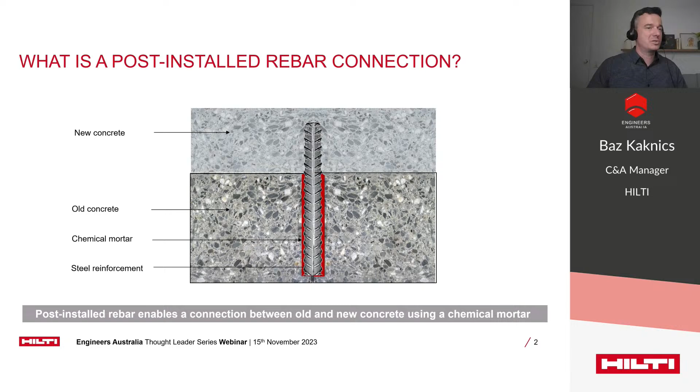The intention of installing bonded bars is to develop a monolithic connection between new and existing concrete elements, which we often refer to as concrete-to-concrete connections. This is achieved by drilling a hole into the existing concrete, which is then injected with a pre-qualified high-strength, usually special type of epoxy or vinyl ester product. After this, a cut-to-length reinforcing bar is inserted and left alone until the chemical is fully cured. The surface of the existing concrete is often roughened to improve the transfer of shear stresses between the new and old concrete. And finally, the new concrete is poured, turning the two structures into one monolithic unit.

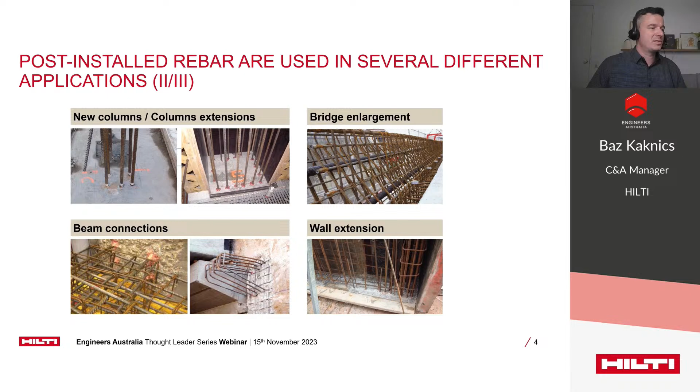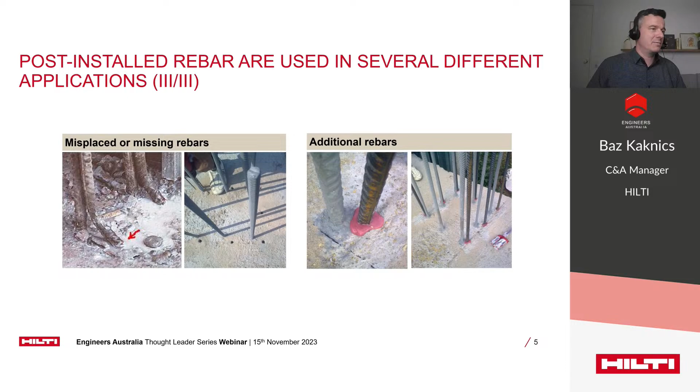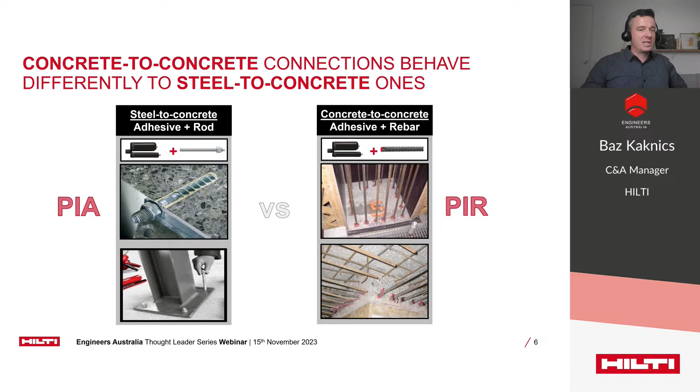One of the biggest challenges we see designers face is designing post-installed rebar connections correctly. Actually, there is little awareness out there about the existence of various design methods, and today's webinar is meant to cater for exactly that issue. Therefore, in the first part of the webinar, we will investigate how post-installed rebar design differs from post-fix anchors and exactly what design methods should be chosen for your given application.

So in order to understand the differences between the behavior of post-installed rebar and anchors, I'd like to take you back to the very basic principles and re-examine what exactly happens when we install an anchoring element into the concrete and put it under load. By doing this exercise, by the end, you'll understand some of the seemingly subtle, however very important differences between the two applications, which finally warranted the development of different design and qualification methods. Based on these learnings, you will be able to select the correct design method which is best suited for your application. So first, let's investigate the basic working mechanisms of any anchor or rebar bonded into concrete-based material.

So this is our concrete, and this is our post-installed rebar in this case.

Let's assume that the embedment depth is relatively shallow here, and we are using a very high-strength epoxy mortar, which will provide us with a strong bond into the concrete. Then, as we exert some tension force onto the bar, which the bar then transfers over the concrete via adhesive bond and friction, this will create stresses in the base material around the fastening.

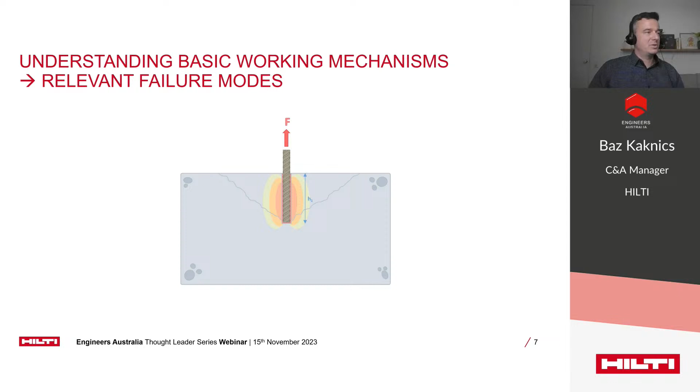Amongst those stresses, there will be tensile stresses, and we know that the concrete's tensile capacity is quite limited compared to its high compressive strength. So sooner or later, we will reach the ultimate limit state where the concrete cracks under tension. These cracks quickly progress into an abrupt failure called concrete cone breakout, and ultimately our connection fails. And here you can see the typical shape and form of the concrete cone.

After decades of research and tens of thousands of destructive anchor tests, the experts found that the concrete cone actually has a typical shape for the common concrete strength classes, which is characterized by an approximately 34-degree side angle, or in other words, this corresponds to a 1 to 1.5 depth to radius ratio.

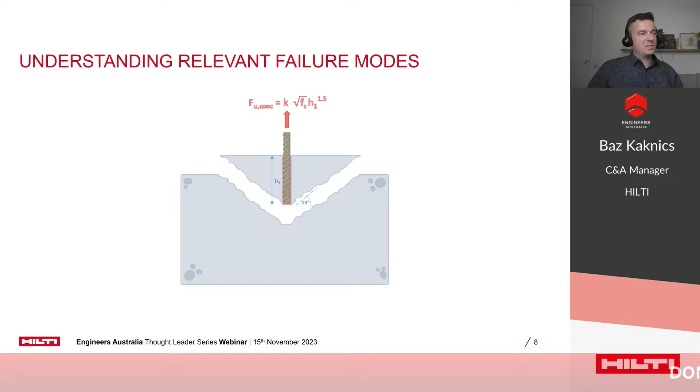Based on the existing data, the scientists were able to find a mathematical formula to quantify the concrete cone resistance, which, as you can see, is relatively a simple function of the concrete strength and the embedment depth. Note that the cone capacity is directly proportionate to the concrete's tensile strength, which here is expressed as the square root of the compression strength.

And more importantly, there is an exponential function relative to the embedment depth, which means that selecting a deeper anchorage length will result in a significantly improved cone capacity.

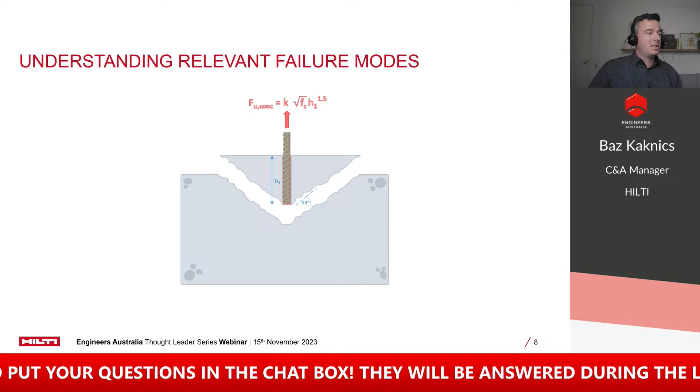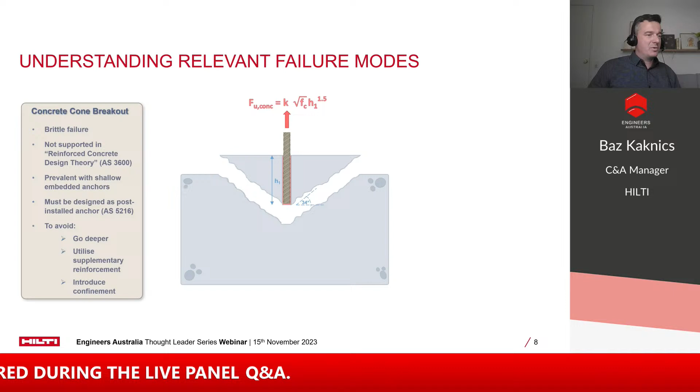So to sum it up, the most basic failure mechanism is concrete cone breakout, which is an abrupt, brittle failure mode. Brittle failure modes and the utilization of the concrete's tensile strengths are generally not supported in reinforced concrete design theory. For example, in our AS3600 standard, which covers the design of concrete structures.

But it is also true that most concrete-to-concrete connections typically involve long enough anchorage lengths so that the cone breakout is unlikely to be the governing design case.

So that being said, we will still have to live with the possibility of this failure mode in most anchoring applications, where, for example, we don't always have the luxury to select a deeper anchorage length or to directly transfer the tensile stresses onto an existing rebar, or perhaps to have any other measures in place which could hinder the formation of the concrete cone.

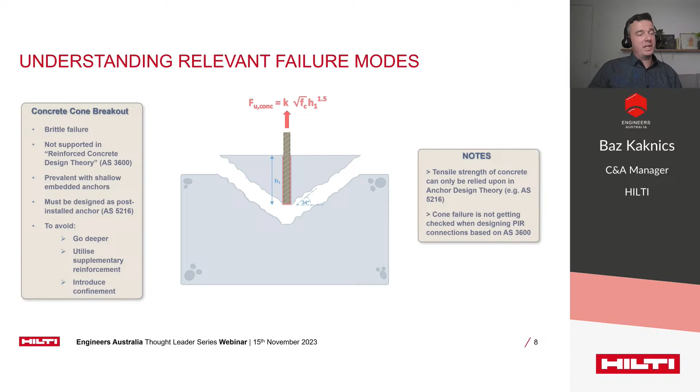Therefore, Section 6 of the AS5216, which is our design standard for post-installed anchors, mandates necessary strength checks against this failure mode. In summary, the utilization of the base material's tensile strengths and the handling of the concrete cone failure is the first major difference between anchor and rebar design theories.

And if we were to plot the development of the concrete cone capacity based on the increasing embedment depth, we would end up having a nice parabolic function. As I said earlier, by selecting a deeper anchorage length, the resistance against cone breakout will improve exponentially.

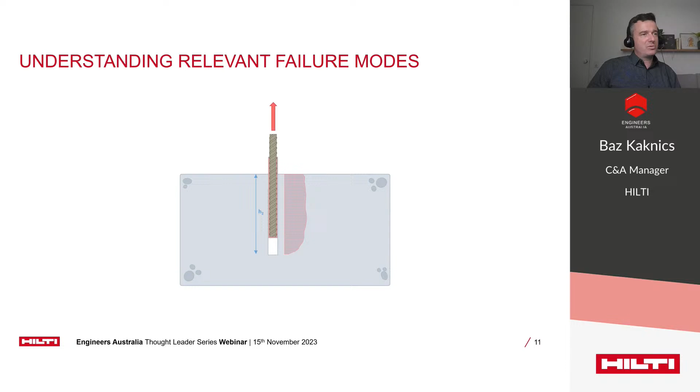This happens right until we reach the ultimate limit state. And at this point, we will experience a drop in the maximum load along with increasing anchor displacements. In other words, a pullout or bond failure happens.

Multiple studies have verified that up to an embedment depth of approximately 20 times the bar diameter, which is 20D, the bond stress may be assumed uniform along the entire anchorage length in the ultimate limit state.

In case of a pure pullout failure, the mathematical formula is again very simple. Tau here represents the chemical bond strength, which we simply need to multiply with the cylindrical bond surface area in order to calculate the anchor's pull-out resistance.

In the relevant Australian design standards, the formulas might look different to the simplified equation shown here. This is because, for example, AS5216 accounts for the potential combination of two failure modes instead of one, namely a combined cone and pull-out failure.

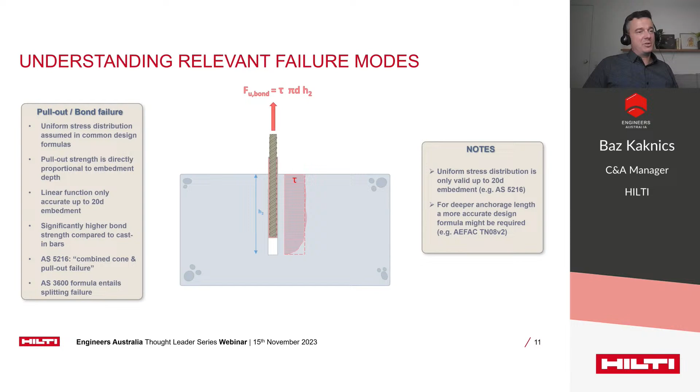AS3600, on the other hand, for the design of cast-in bars, is combining the pull-out with a potential splitting failure, which could limit the development of the full bond strength in case there is not adequate concrete cover surrounding the bars. Regardless of the different approaches in the various design standards, the basic principles of bond failure are still valid here, and an important takeaway is that the uniform stress distribution only holds true up to an embedment depth of 20D.

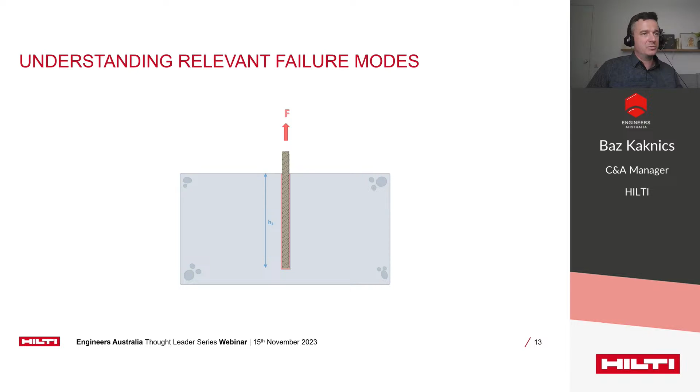Finally, the last failure mode I will look into today is basically the ideal outcome for most designs, which is the full development of the reinforcing bar—in other words, being able to reach full yield or steel failure. It's probably not necessary to explain the mechanisms of this failure mode; it's well predictable by a relatively simple and reliable formula. One of the main benefits of fully developing the bars is to utilize the bar's ductile reserves to achieve more ductility in the design. Also, by designing to the full yield of the reinforcement, the use of materials in a structure can be optimized, minimizing overall costs as well as the carbon footprint of the build.

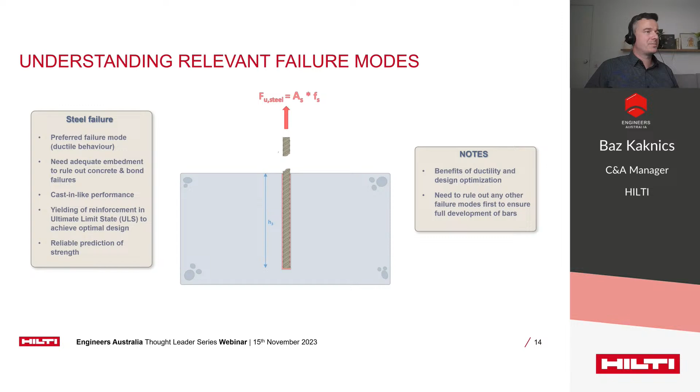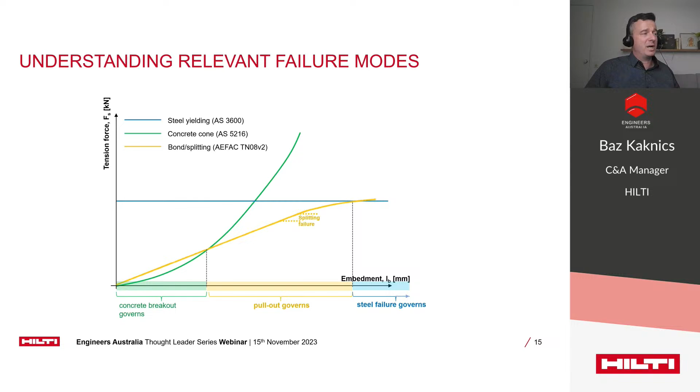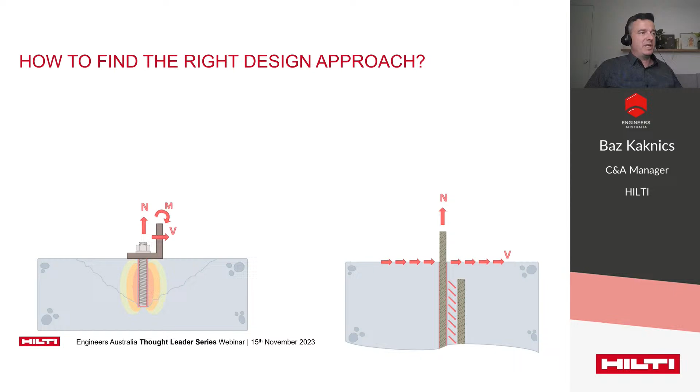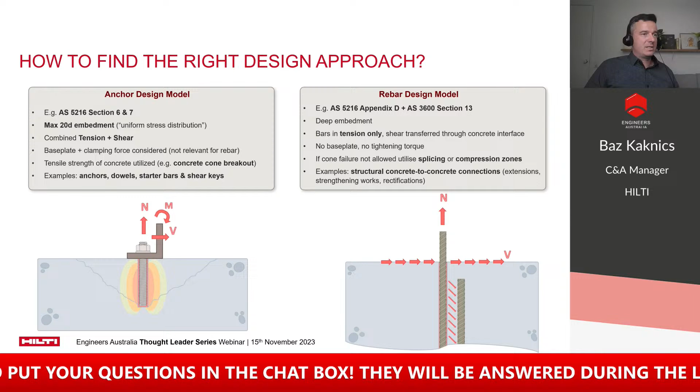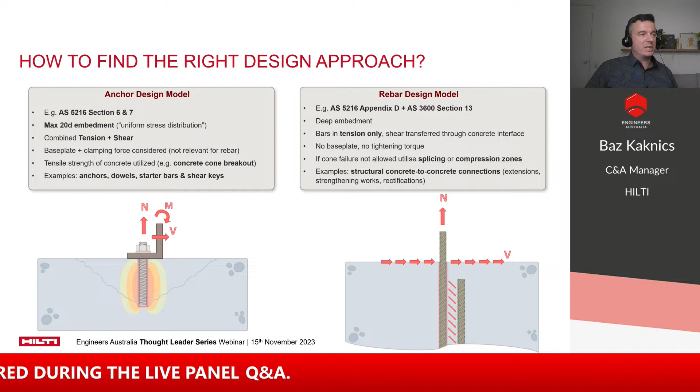In summary, the main goal of my presentation today was to help understand the differences between anchor and rebar design theories. In certain cases, rebars may be designed based on the principles of anchor theory, for example, when used as shear keys or dowels, and the embedment depth is not greater than 20D, as we discussed earlier. Designers might also use this design method for shallow embedded starter bars, where concrete cone failure is expected and must be accounted for. For the more traditional applications of post-installed rebar, however, the specifically developed rebar design methods should be utilized. These are suitable and safe for deeper embedment depths, but the bars must only take tension forces, and shear force must be transferred by different ways, for example, by roughening the concrete interface.

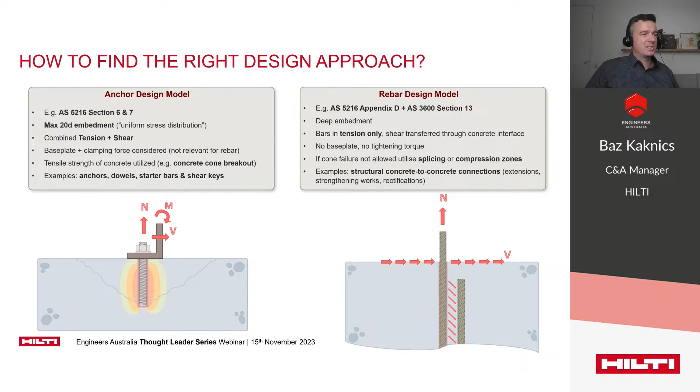In case the design method does not allow for the direct transfer of tensile stresses into the base material, for example when using AS3600, then lap splicing must be utilized, or the bars must be anchored within the compression zone of the structure. A couple of application examples for using the rebar design method include typical concrete-to-concrete connections, slab extensions, wall-to-slab, wall-to-beam connections, and various rectification works, as we showed at the beginning of the presentation.

Now that we've differentiated rebar from traditional anchor applications, I believe it's important to go through and summarize the different design methods which currently coexist in our code landscape. As shown in this slide, there are three different approaches for designing post-installed rebar, and each situation should be assessed correctly by the designer so that the most suitable design method can be chosen.

The first one, on the left-hand side, which means designing the rebar as an anchor, often relates to dowel or shear key applications. The qualification is according to the EAD document ending with 499, and upon successful assessment, the chemical gets awarded with an ETA technical approval, such as the one referenced here. The design method is according to AS 5216, sections 6 and 7, just like in the case of normal anchors under combined tension and shear loading.

The second option in the middle follows the common principles of reinforced concrete design theory, and the bars will be designed identical to cast-in bars based on the principles of AS 3600. This method will cover common structural rebar connections where the development length is typically longer than 20D and the shear force is not directly transferred by the bars.

The chemical here will require a special qualification report, based on the assessment document ending with 087. This method doesn't utilize the tensile capacity of the base, and the tensile stresses will have to be transferred either via lap splicing with an existing bar, or the area of the fixings must be under constant compression so as to rule out the possibility of a concrete cone failure.

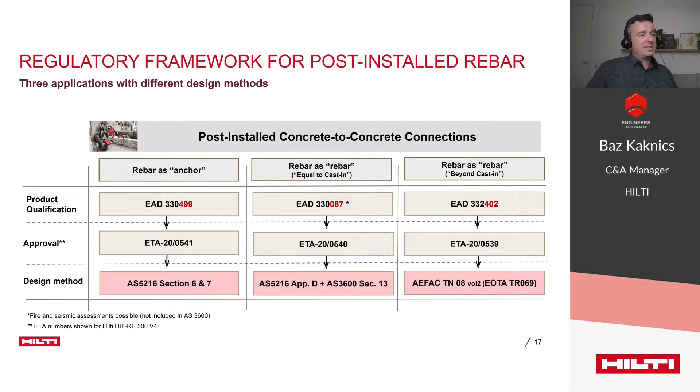The third option on the right is a relatively new design method, which combines the benefits of the previous two. This will again require a third-party technical approval and qualification, and the performance of the bars may be higher than that of cast-in bars. This new method utilizes an improved bond splitting model, which is very important to emphasize. It differs by product to product, so it's product dependent, and it will be explained in greater detail during the second part of this webinar.

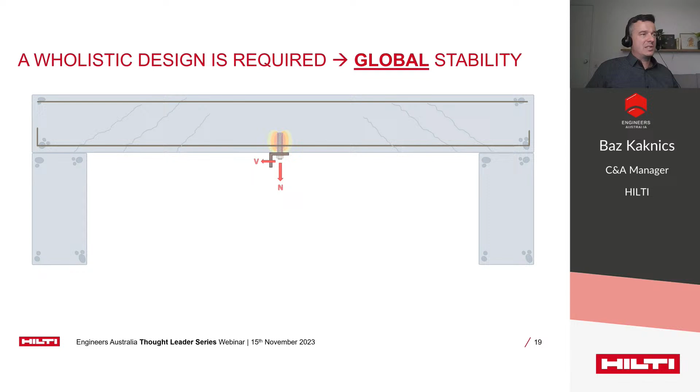Just another word of caution: the failure modes discussed here today are all considered local failure modes, which may develop as a direct result of the interaction between the fastening and the base material. The designer should, of course, never forget to ensure that the design actions introduced by the anchors can be safely taken up by the concrete structure, and that there is adequate load path for the safe transmission of these additional forces down to the foundation of the structure.

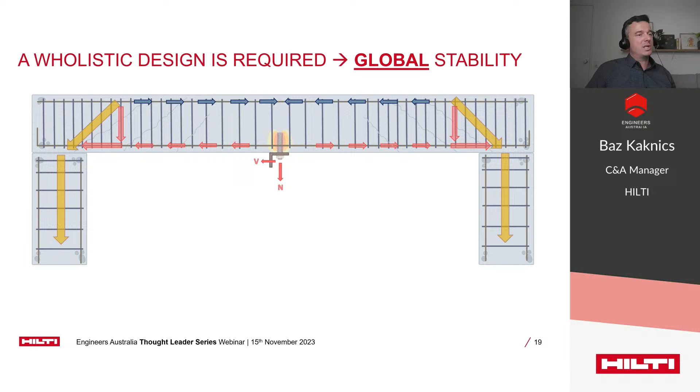For example, it must be verified that the structure has adequate shear strength and existing or supplementary reinforcement to safely transfer the stresses away from the anchorage. To better understand the requirements for a concrete structure to accommodate the anchor forces, I would recommend checking out and following the specifications of Appendix C within the AS 5216 standard.

With that, my presentation concludes, but please stick around, as in the second part of the webinar, Dr. Tilak Pokharel from AEFAC will provide you with an in-depth explanation of the design procedure utilizing the latest international and local guidelines. Thank you very much for your attention.

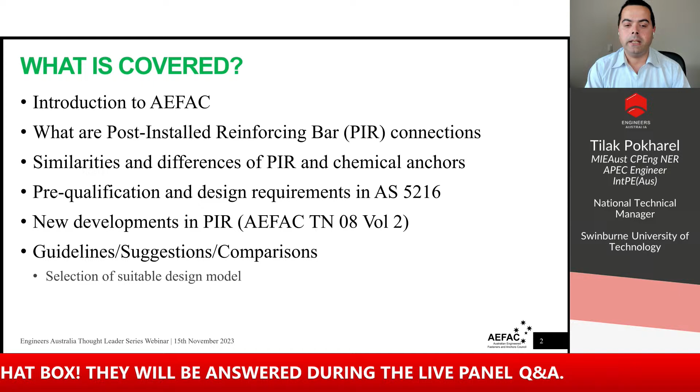Then I will talk about the new developments in post-installed rebar connection and the utilization of that newly developed design method in designing post-installed rebar connections in Australia.

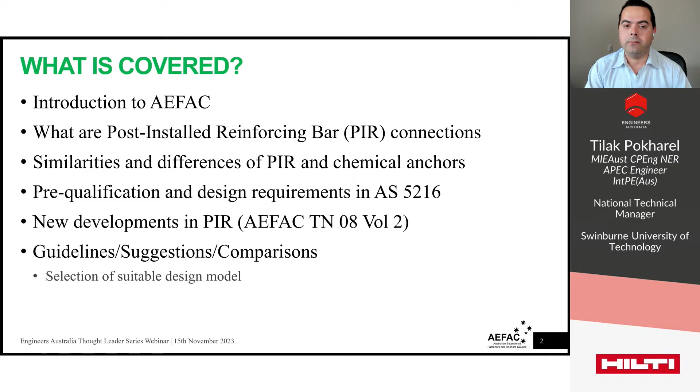Finally, I will conclude my presentation by providing some guidelines or suggestions on selecting proper design method and a brief comparison of different design methods we have available in Australia.

I would like to start this presentation with three critical elements that are very important to ensure the quality assurance of anchors. This presentation will be focusing on basically those three elements.

The first one is pre-qualification. The anchor product must be independently tested and assessed to be fit for purpose. For example, if you are using anchors in post-install rebar applications, they must undergo a separate and unique type of testing and assessment with reinforcing bar to meet the requirements.

The second one is design. Robust design is required to ensure all possible failure modes are considered, and design is done by considering all those failure modes and identifying the critical failure modes.

And finally, installation. Installation is usually the weak link in the anchorage industry. There have been many failures occurred in Australia and globally in the past because of poor installation practice. So all three of these elements are key for the quality of the connections.

For those who do not know about AEFAC, AEFAC stands for Australian Engineered Fasteners and Anchors Council. It is a not-for-profit industry initiative. It was founded in 2012 by Swinburne University and six other industry partners.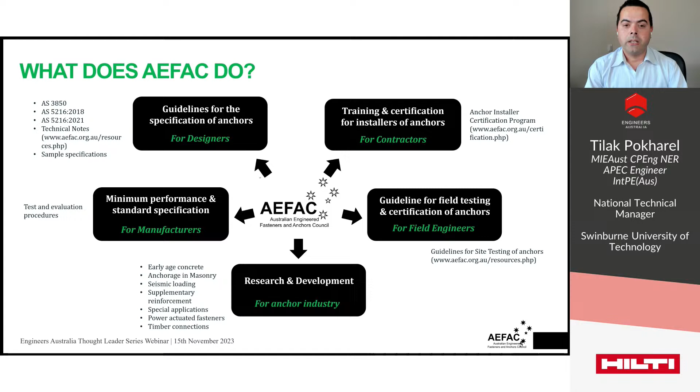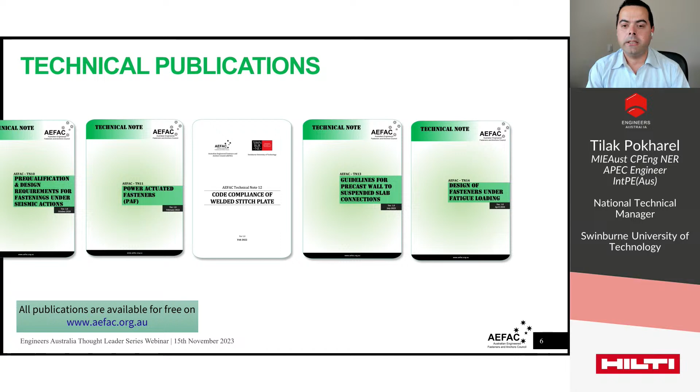Before I move into the post-install rebar part, AEFAC has several technical publications, including technical notes that you can see on the screen. If you are interested in any of those, they are freely available to download on the AEFAC website, aefac.org.au. Now let's come back to the post-install rebar.

Let's look at the definition of PIR and chemical anchors that are currently used in Australian standard AS 5216. AS 5216 2021 defines post-install rebar as the reinforcement that is anchored into mature concrete using adhesive in a drilled hole. The standard defines chemical fasteners as the post-install fasteners that include a steel element.

The steel element could be a threaded rod or reinforcing bar, and a bonding compound that transmits load from the embedded steel element into the base material, which is concrete. They are also known as bonded fasteners or adhesive fasteners, depending on where you are.

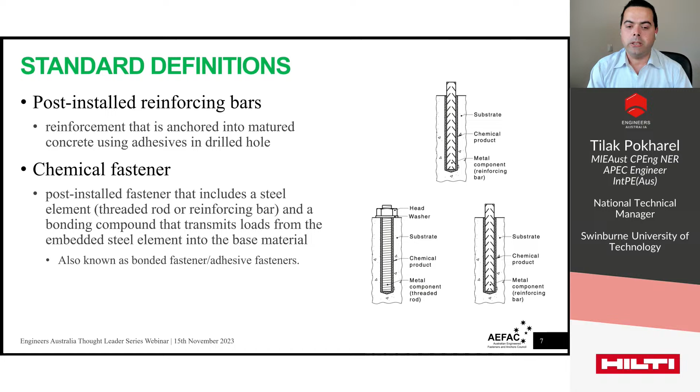There are some overlaps between PIR and chemical fasteners, as you have seen in the definition. Thus, some designers confuse chemical fasteners and post-install rebar fasteners. The previous speaker has already defined the differences between those anchors, and I'll go a little bit deeper into that. Hopefully by the end of this presentation, it will be clear that there is a distinction between these two types of fasteners, and that will help avoid confusion.

As already defined, but for completeness, or if you missed that part, I would reiterate: post-installed rebar is the rebar that is installed after the concrete has been poured and cured, usually after 28 days of concrete casting. Once the concrete is hardened, a right-size hole is drilled at the required location.

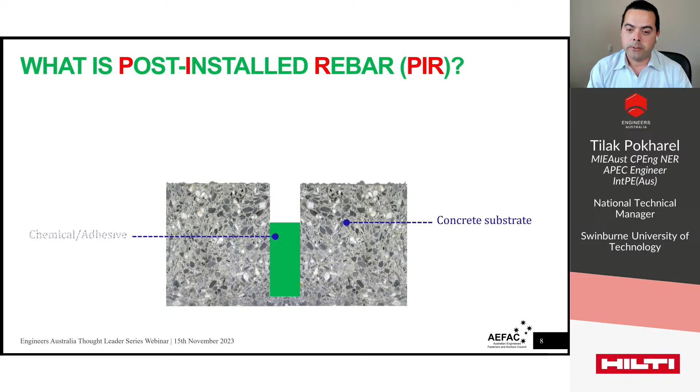After the hole is cleaned as per the manufacturer's installation instructions for the chemical being used in the application, the chemical or adhesive is filled into the hole, usually two-thirds full, and then the reinforcing bar is inserted.

It is very important to note that post-install reinforcing bar is only designed to take tension force. No shear force is taken up by the reinforcement. New concrete is poured on the exposed part, and it is very common to make the surface rough before pouring the new concrete, as the shear force will be resisted by this interface.

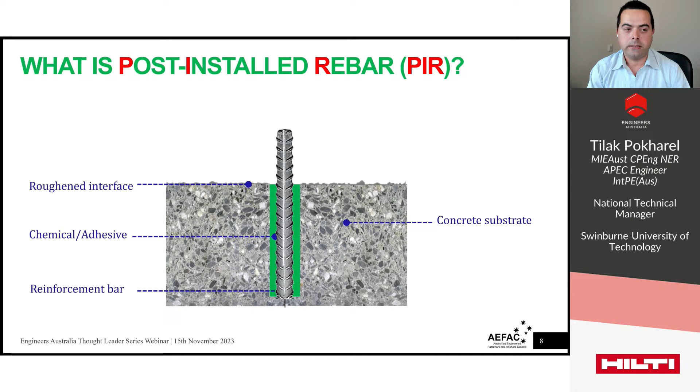In Australia, we have Australian Standard AS 5216, and the recent edition is 2021, for the pre-qualification and design requirements for post-install fasteners and cast-in fasteners. That standard covers the chemical fasteners as well as PIR, post-install reinforcing bar connections.

This recent edition, 2021, covers PIR in Appendix D. In this presentation, I'll not go into the detail of the design model and design process we have in the standard. Rather, I'll focus on the concept and more about the limitation and the scope of that method, and I will highlight why the new method is important and what is improved in the new design model.

The design model we have in the current standard is referred to as a current rebar model in this presentation. For the new model, I'll be using a new rebar model, which I'll introduce in the next couple of slides later. I want you to note that the design method we have in AS 5216 2021 Appendix D is exactly the same as the design model we have in AEFAC Technical Note 8, Volume 1.

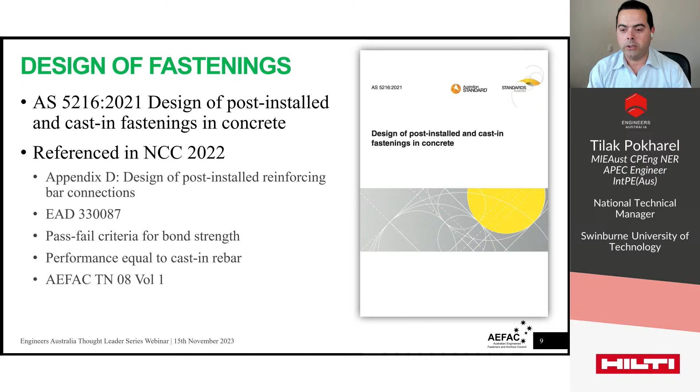So before looking into the post-install reinforcing bar in detail, let's briefly look into the design of chemical fasteners in tension in accordance with AS 5216.

As Baz has introduced, we need to consider different failure modes, and we need to find the minimum value for that as design capacity or the tensile capacity of fasteners. There could be different failure modes: steel failure, concrete cone failure, pull-out failure, or the combination of pull-out and concrete cone failure, concrete splitting, and could be more if you are using supplementary rebar or something.

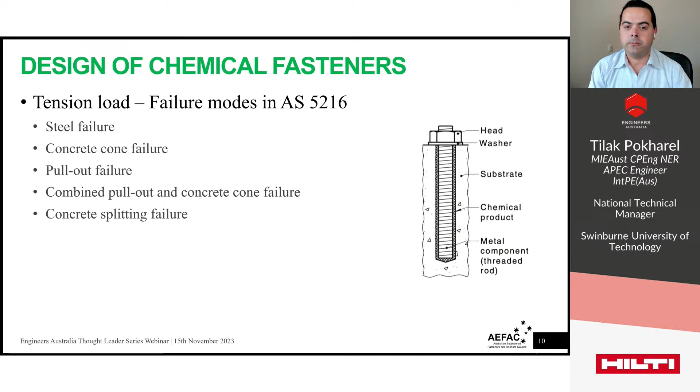You need to define or verify each failure mode and identify the critical one, and that will govern the design strength or the design capacity of the fasteners. This is the fundamental concept AS5216 is based on, and it's sometimes referred to as the CC method, concrete capacity design method.

There are some limitations in terms of diameter and embedment depth of the fasteners. In this presentation, I will highlight the limitation in terms of depth, because this is important for the post-installed reinforcing bar connections. If the chemical fasteners is less than 20 times the diameter of the anchor, then the anchor model, or AS5216, can be used: chapter 6, 7, and 8.

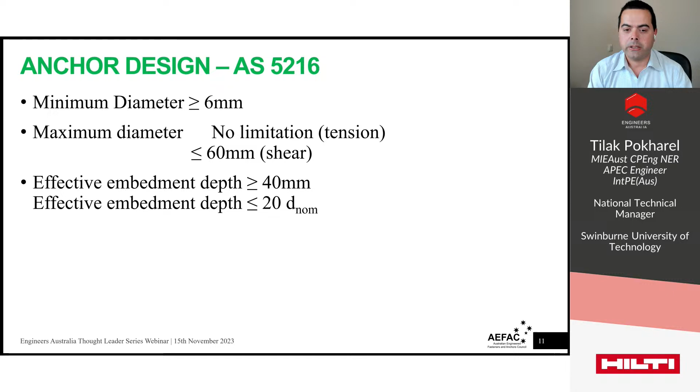So that design process will include the verification of 5 or 6 failure modes I included in the previous slide. This design model we have is referred to as anchor model in this presentation. This anchor model can be used for threaded rod as well as post-install reinforcing bars.

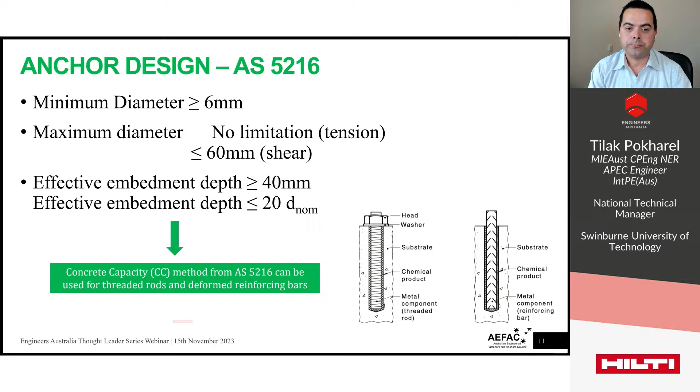But it is important to note that the scope of the pre-qualification document should clearly say that this chemical, or this application, is safe with reinforcing bars. And this is referred to as anchor model, as I mentioned earlier.

So it is assumed in 5216 that the bond strength is uniform throughout the embedded length of the anchor. The previous speaker has clearly explained that, and this assumption or concept is called the uniform bond stress model. And this is true for shallow embedments; the uniform bond model will be applicable to shallow embedments.

It has been tested extensively in Australia and Europe and other countries for 8 to 10 times the diameter of the anchor, and it has been proved to work well if the embedment depth is about 20 times the diameter of anchor. This is the reason why there is a limit on the maximum embedment depth of the anchor in the anchor model.

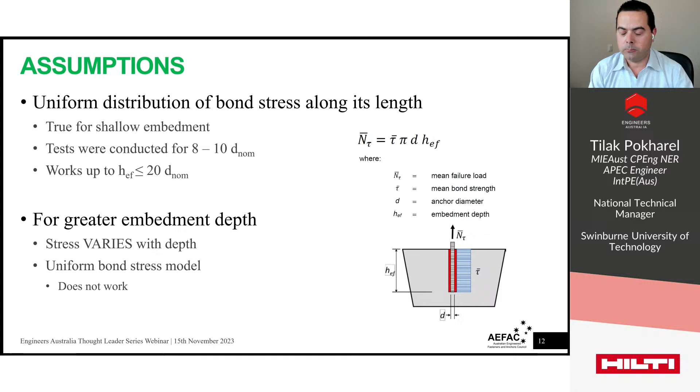So, as you'd expect, this uniform bond stress model does not apply to anchors with deep embedment in reinforcing bar applications. We cannot use this anchor model from AS5216 to calculate the pull-out capacity of the long post-installed rebar, which is more than 20 times the diameter of the anchor.

Then what are the options? There are a couple of options available, fortunately. One option could be using the well-established AS3600 standard, the concrete standard, to calculate the development length, and that development length can be used as the anchorage length in post-install rebar application.

This is only possible if we have some evidence that proves the post-install reinforcing bar works at least similarly or better than the cast-in rebar. This is very important because the presence of an extra layer of chemical between the reinforcing bar and concrete could alter the performance of the system. Also, the overall behavior of the connection depends on the chemical, its strength, stiffness, and other parameters. So this is again, obviously, outside the scope of AS3600.

If you have fasteners with a pre-qualification report such as ETA that proves the PIR works at least similar to an equivalent cast-in application, then the embedded length of the post-install reinforcing bar is equal to or longer than the development length. Rebar would yield, or there would be steel failure or rebar failure in tension, and we can use that principle in designing the post-install reinforcing bar.

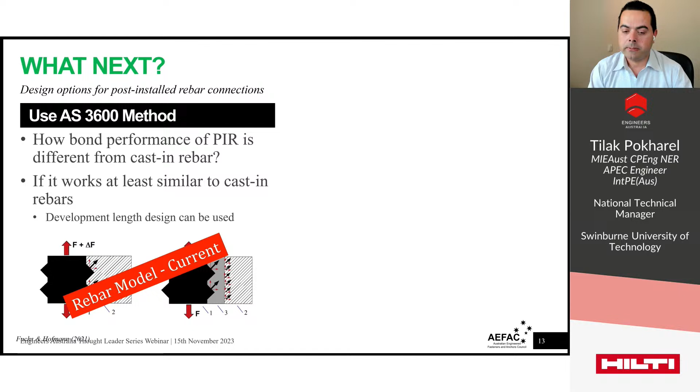So the question is: is there any alternative to the current model which would utilize the better bond behavior of chemicals and design less conservatively than the current model? The answer is yes. There is a better alternative design model available, which I will be talking about in the next few slides. This model is referred to as rebar model new in future slides.

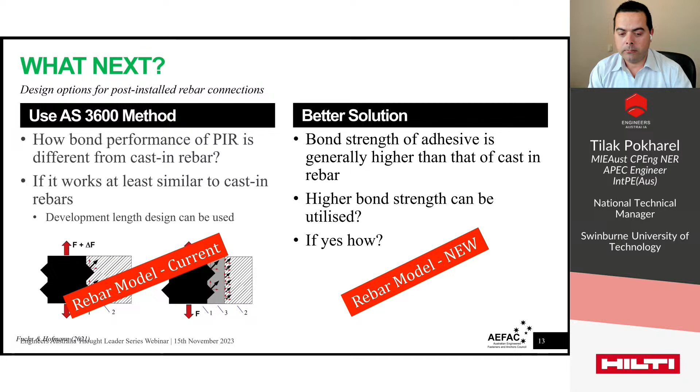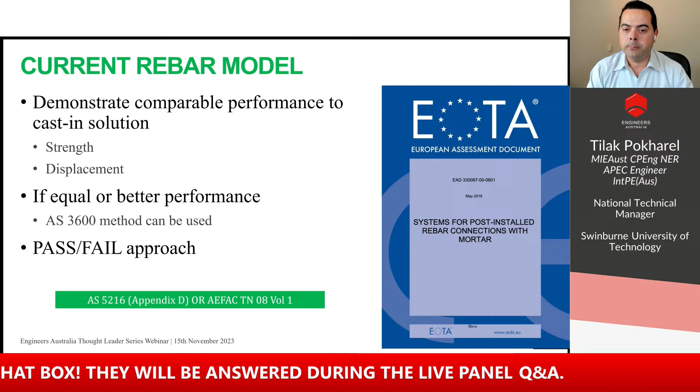The current rebar model has some limitations. Before I talk about the limitations, let's look briefly at the design concept. AS3600 is used to calculate the development length, as I mentioned earlier, and we use that development length as the anchorage length in the current rebar model.

To demonstrate the comparable performance of the PIR to cast-in solutions, we need to do a test according to Appendix D of AS5216, which refers to EAD 330087. That means if the PIR system, the post-install reinforcing bar system, has passed the test and assessment in accordance with EAD 330087, it is proved that the PIR works at least similar to or better than cast-in rebar, so you can use the AS3600 design principle, section 13 of AS3600. It is very important to note that even if it is proved the post-install reinforcing bar works better than cast-in rebar, this standard does not allow you to utilize the better performance of PIR.

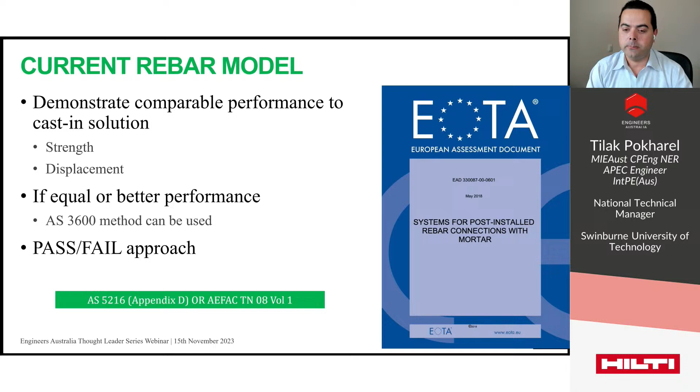In other words, this is a pass-fail approach. That is, if the bond strength of the post-install reinforcing bar is higher than that of the cast-in rebar, we still have to use the bond strength of the cast-in rebar. I'll explain this with numbers in the next slide.

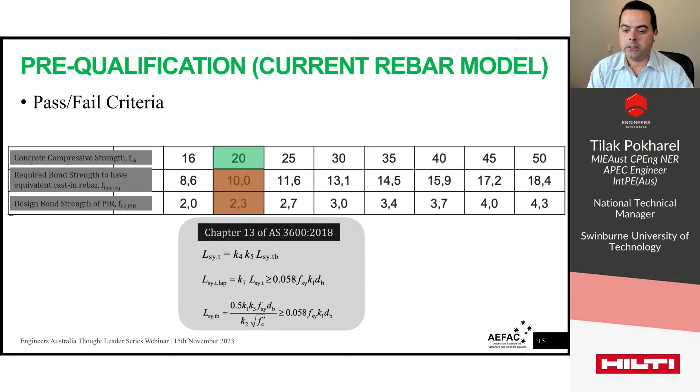So there is a large safety margin here. In the pre-qualification method we have in AS5216, or in the current rebar design model, it does not matter how large the bond strength from the experiment is - whether it's 10, 20, 30, or 40. The design bond strength is still 2.3. We use chapter 13 of AS3600 to get the development length as the anchorage length.

So what is the issue here then? The bond strength of chemicals we use in connecting post-install rebar is significantly higher than the cast-in equivalent. But as we just saw, the current rebar model does not utilize this higher bond strength.

The limitations in AS5216 were put in place to prevent slip of the rebar under serviceable conditions, to avoid splitting of the concrete, and to address the uncertainty of unequal distribution of bond strength over the embedded length. Thus, if we have a new model that addresses slip under serviceability load, splitting of the concrete, and the variation in stress distribution along the length of the rebar, we could utilize the higher bond strength of the post-installed rebar system.

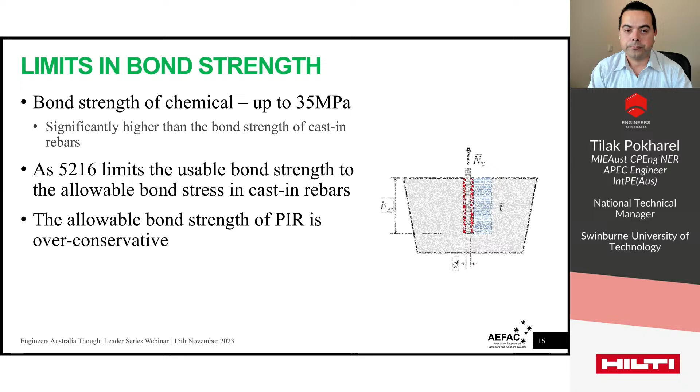So why is it important to take the better or more realistic bond behavior of PIR systems? To understand this, let's look at the effect of bond strength in the overall behavior of post-installed reinforcing bar connections. The bond behavior typically has two aspects: bond pull-out and concrete splitting.

The splitting behavior of concrete is dependent on parameters such as concrete cover, concrete strength, confining reinforcement, diameter, geometry of the rebar, spacing, pressure, and so on. There are so many parameters that affect the splitting of the concrete.

To understand it more clearly, with all other parameters being the same, the bond splitting strength will increase with increasing concrete cover, and this increase continues until it is capped by the bond pull-out strength. This behavior was shown very clearly in the graph by the previous presenter.

However, currently these aspects are not considered while recommending the design bond strength values for PIR. AS5216 or the current model requires the test to be performed using a confined tension test setup, which is used to prevent concrete cone failure. This requires a relatively large cover to prevent concrete splitting.

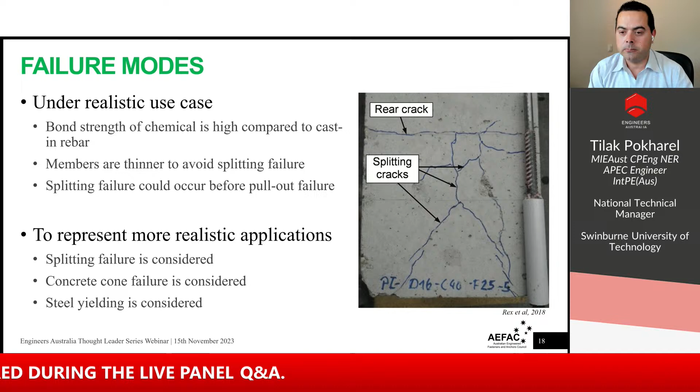Therefore, to understand the behavior of a post-installed reinforcing bar system under realistic conditions, the test needs to be performed using a test setup that could simulate these boundary conditions, which allows splitting of the concrete, concrete cone breakout, and steel yield. The test method I'm referring to here is the test method in the pre-qualification stage.

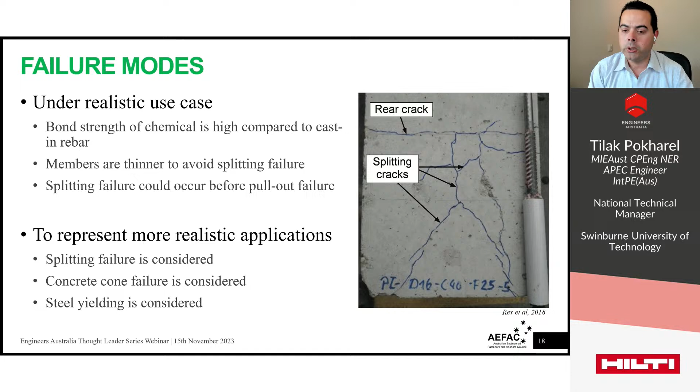The new rebar model covered in AEFAC Technical Note Volume 2, Technical Note 8 Volume 2, includes all those requirements. So in summary, these are the limitations of the current rebar model. One of the important limitations I haven't covered so far is the type of connection that can be designed using the current rebar model.

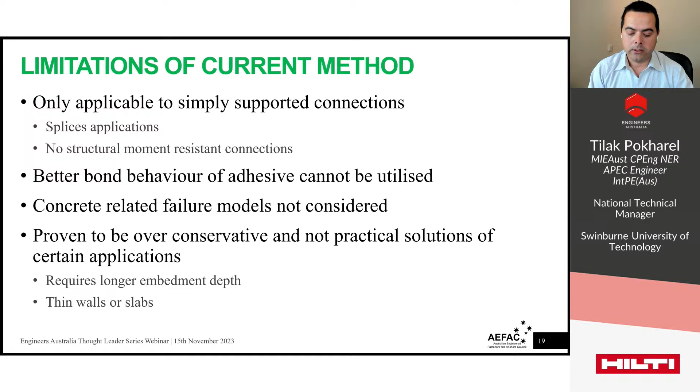The current model can only be used to design simply supported connections. It cannot be used for moment resisting connections, and all other limitations I have already explained in my previous slides. So to address all these limitations, we now have a new rebar model that can be used to design moment resisting concrete-to-concrete connections.

There are still some limitations in minimum and maximum rebar size or embedment depth in this design model, and all those model limitations are given in the ETA or the pre-qualification report, not similar to AS3600.

The new design model is presented in detail in the recently published AEFAC Technical Note 8 Volume 2. This document is freely available to download from the AEFAC website, aefac.org.au, under the resources page. Similar to Volume 1, the design method is limited to static and quasi-static loadings.

If your application requires other loading conditions such as seismic and others, there are other pre-qualification and design methods available. It is recommended to contact the fastener supplier or manufacturer if you have an application outside Volume 2 of the technical note. The design procedure presented in that technical note is applicable to the post-installed rebar system assessed as per EAD 332402 and having a valid ETA.

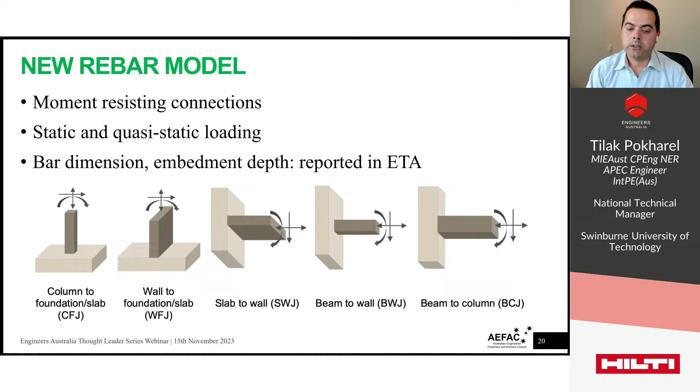As I mentioned earlier, the shear transfer through shear friction between the existing and new reinforced concrete elements should be ensured by some other means, as rebar doesn't take shear load. Some other means could be surface roughening prior to casting the new member against the existing concrete.

To design post-install reinforcing bar connections using the new rebar model, the design principle and procedures are similar to the current process we have in AS5216-2021. The design action effect needs to be smaller or equal to the design capacity.

The design capacities are calculated from the characteristic values of the resistances, similar to AS5216, and the capacity reduction factors. There are a few additional capacity reduction factors in this design model, presented in AEFAC Technical Note 8, Volume 2, and some parameters are already listed in the current version of AS5216.

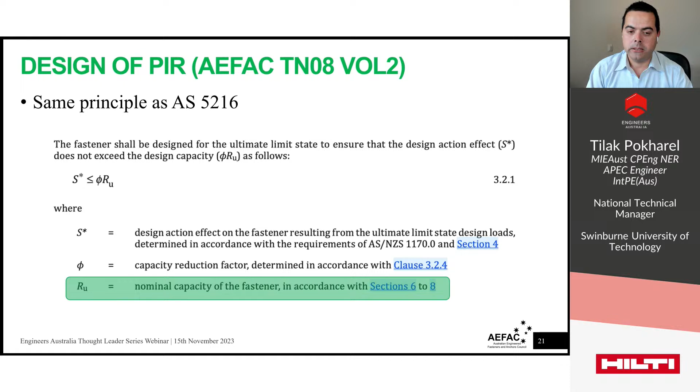Most values and parameters are also reported in pre-qualification reports such as ETA. The major difference in this new rebar model is how we calculate the characteristic capacity of a post-install reinforcing bar. In the current model, there is only one possible failure mode, steel failure, and other failure modes are avoided by having a large embedment depth or large cover.

But in this new anchor design theory, there are other possible failure modes available. As you can see on screen, the resistance is calculated from 3 different failure modes, and the minimum of these will be the resistance of the post-install reinforcing bar. Unlike the current rebar model, the new rebar model considers 3 failure modes.

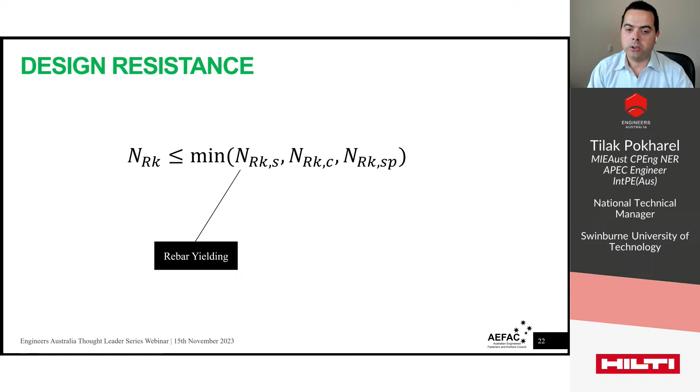The first one is rebar yielding, which is there in the current model as well. Concrete cone failure is not covered by the current rebar model, and bond splitting failure is again not covered by the current design model. The combined pull-out and concrete breakout resistance is also covered in the bond splitting model.

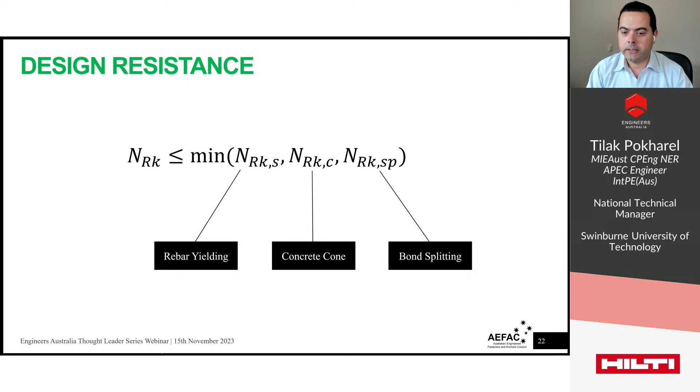That includes some geometric parameters not covered in AS5216, such as small edge distance or smaller spacing between different rebars, as well as anchorage length higher than 20 times the nominal diameter of the rebar. So, 3 failure modes.

The first one is, I think, a straightforward and very accurately predictable behavior: the steel failure, steel rupture of the post-install reinforcing bar. It is determined by geometric parameters such as cross-sectional area of the rebar and the yield strength of the rebar. If you know those two parameters, which you do, you can calculate the characteristic steel failure capacity of the connection.

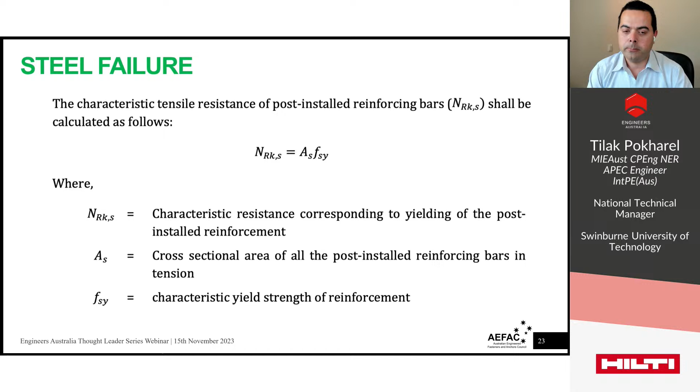So even if there are multiple failure modes shown in the previous slide, it is recommended to have this kind of failure mode in the design of post-install rebar connections, because it is a very predictable and ductile failure and has a few advantages over other possible failure modes.

Second one, concrete cone failure. If you are familiar with AS5216 and the concrete cone design model we have in Chapter 6 of AS5216, this shouldn't be new for you. This is exactly similar to the anchor model we have in AS5216-2021.

The tensile capacity, N-RKC, is determined from the reference characteristic capacity, N0-RKC, and there are 4 or 5 other parameters. The reference capacity N0-RKC, this concrete cone capacity of a single fastener without any disturbance, is calculated using the very popular concrete cone formula: K1 times square root of FCK, times LB to the power 1.5.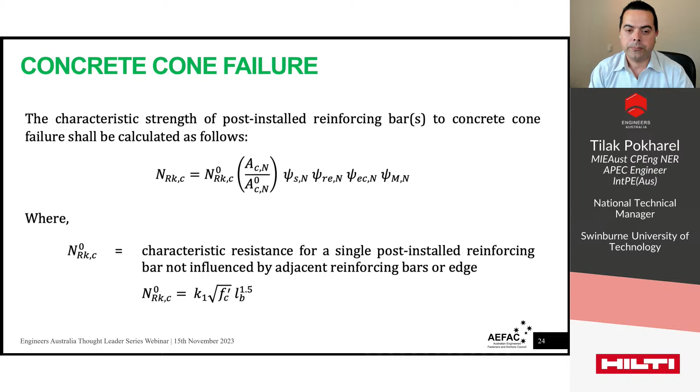The only difference here is we have HEF in AS5216; in the new rebar model, we use LB as the embedded depth of the fastener. Other parameters are similar to those presented in AS5216. The only difference is the limitations in the configuration of fasteners given in AS5216 are not applicable when designing a post-install reinforcing bar connection.

This is because they are not designed to take a shear force, and the plane-section-remains-plane principle, or the rigid base plate assumption, is automatically satisfied if you are connecting one member to another designed according to AS3600. This is the new concept we have in anchorage design.

We don't have this bond splitting failure in AS5216. In this model, the bond slip behavior is considered to address that bond slip behavior I introduced earlier. The bond slip behavior, or concept, is taken from Model Code 2010.

Some of the curve-fitting parameters for that Model Code bond slip behavior are determined from testing. As I mentioned earlier, a number of tests were conducted to obtain those parameters, and most of the tests are unconfined tests that allow concrete-related failure as well. As you can see on screen, there are a few parameters highlighted in gray, which are determined from the ETA, the pre-qualification test we conduct to assess their performance.

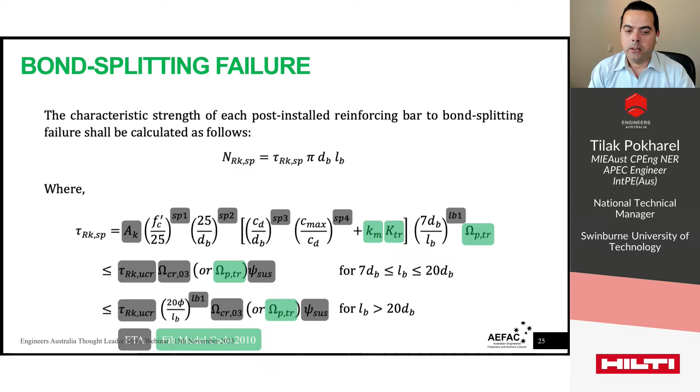A few parameters for the bond slip behavior are determined from the model code. The ones highlighted in green are determined from Model Code 2010, which addresses the effect of transverse reinforcement or confinement provided by the transverse reinforcement and stirrups, and also addresses the effect of cracking, in this case 0.3 mm cracks, in the bond slip behavior. The other parameters, which are not highlighted, are project specific requirements and can be safely used to calculate or determine the bond splitting capacity of the post-install reinforcing bar connections.

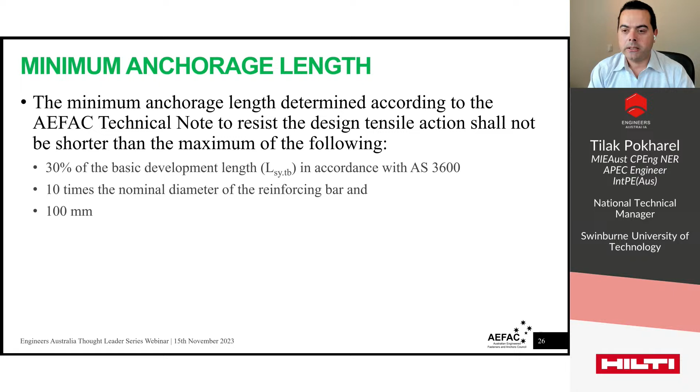There are some limitations as well, such as minimum anchorage length and maximum anchorage length, which can be found in the AEFAC Technical Note Volume 2.

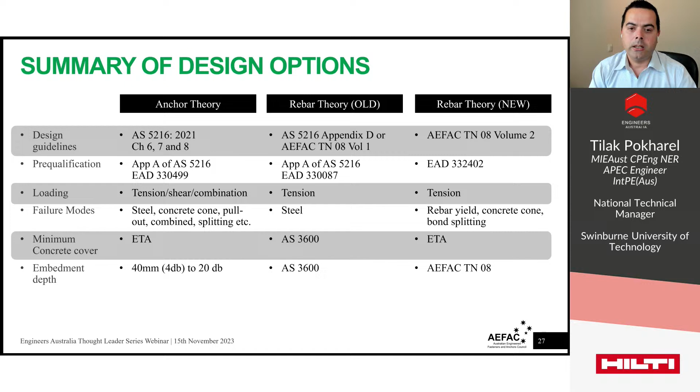This is the summary of the models we have in Australia at the moment: Anchor Theory, Rebar Theory Old, and Rebar Theory New. I'm not going into detail because Baz has already summarized some of them in his presentation. This table is a bit more detailed compared to the table you saw earlier, and you can clearly see they are self-explanatory. We can discuss them if there's any confusion.

A final few things I want to highlight: the different EADs, specifically there are 3 EADs for the pre-qualification of post-install chemical anchors for reinforcing bar. The first one on your left is EAD 330499. This one is for the anchor model, and it includes the pre-qualification of chemical fasteners with threaded rod or rebar as the anchoring element. This EAD covers rebar up to 20 times the nominal bar diameter.

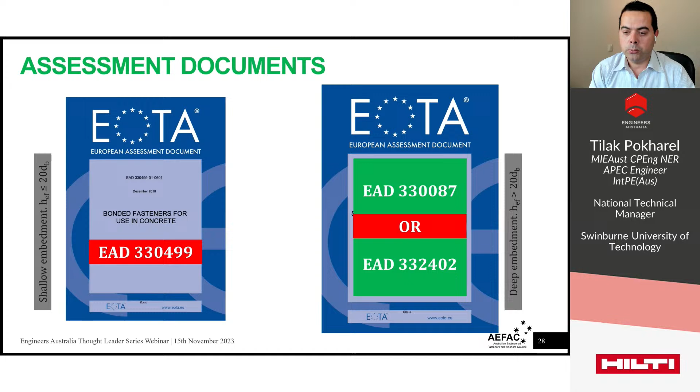If your application is longer than 20 times the bar diameter, you have the second and third EADs, which are EAD 330087 and 332402. The first of these is for the old rebar model, which we have in AS5216, and the second EAD is for the new rebar model. This is covered in AEFAC Technical Note 8, Volume 2.

Accordingly, the pre-qualification reports, such as ETAs, that are produced are different depending on the EAD you are using. The ETA issued in accordance with EAD 330499 is used for the anchor model, and EAD 330087 and EAD 332402 ETAs are used for the rebar model. The previous one is for the old rebar, the later one is for the new rebar.

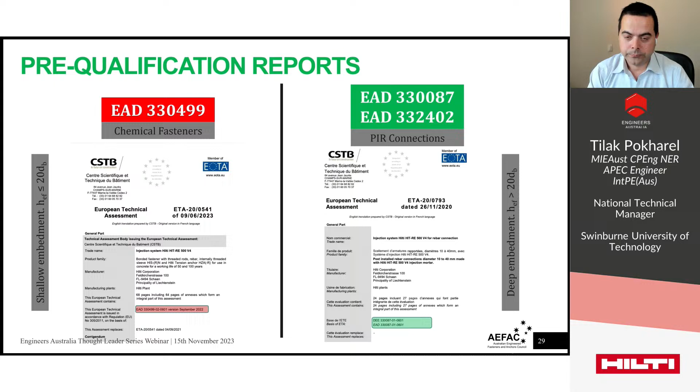I would like to conclude my presentation with the slide you've already seen for post-install reinforcing bar connections. The pre-qualification is done in accordance with Appendix A of AS5216 for post-install reinforcing bar. Appendix A refers to EAD 330087 if you are using the old rebar model, and EAD 332402 if you are using the new rebar model.

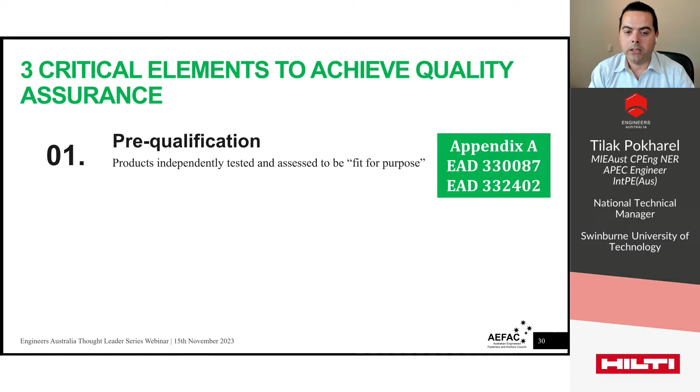The design of a post-install reinforcing bar can be done in accordance with AS5216 Appendix D or AEFAC Technical Note 08 Version 2, depending upon the pre-qualification report you have for the particular PIR system you are using.

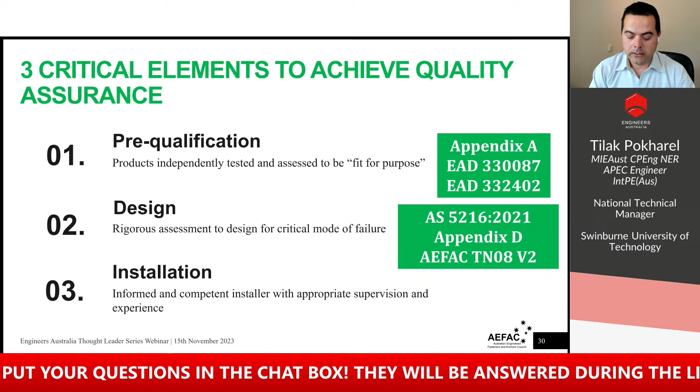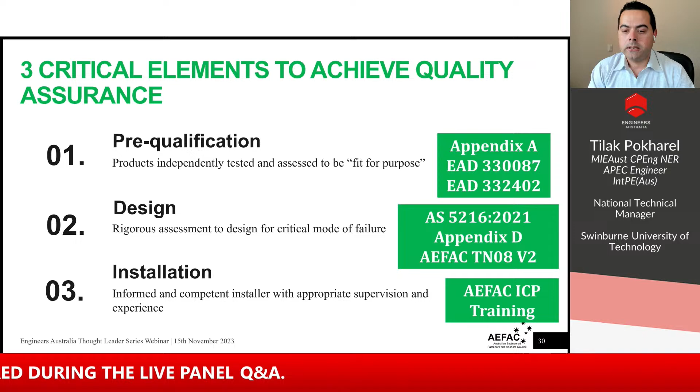And finally, the installation. Installation in accordance with manufacturer installation instructions is crucial to achieve the desired performance. For post-installed rebar connections, the required hole depth may be large, and hence installation quality is extremely important. The installation must be carried out in accordance with the manufacturer installation instructions.

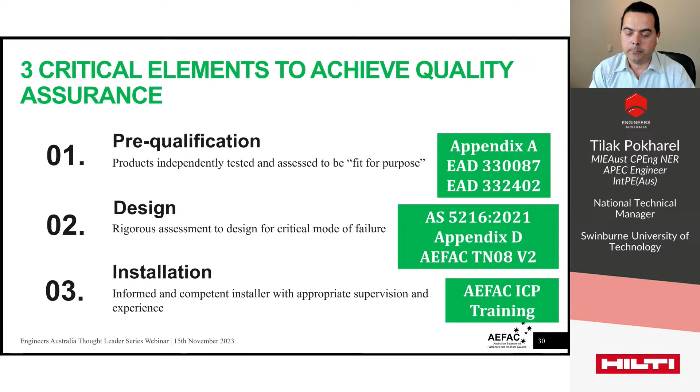The installation should only be performed by competent personnel who know what they are doing. We recommend the installer be trained to install such anchors, either certified by AEFAC or trained by the anchor supplier or manufacturer for specific applications. That's all I have for you today.